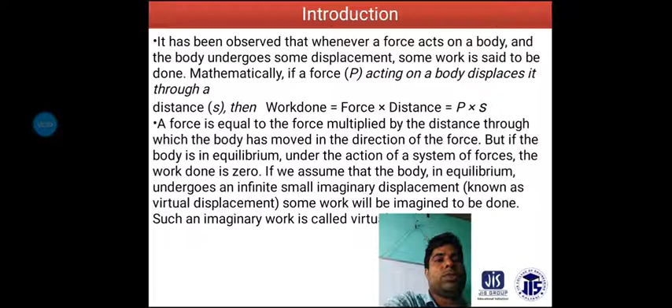But if the body is in equilibrium under the action of the system of forces, the work done is zero. So we assume the body in equilibrium undergoes an infinitely small imaginary displacement, known as the virtual displacement, and some work is imagined to be done. Such imaginary work is called virtual work.

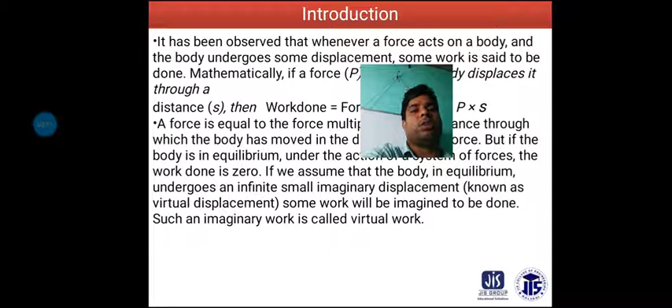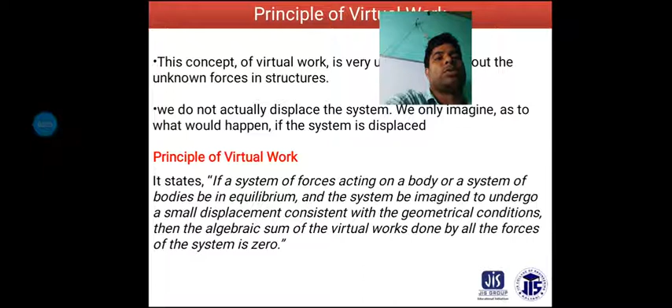The concept of virtual work is very useful in finding the unknown forces in structures. We do not actually displace the system, we only imagine what would happen if the system were displaced. The principle of virtual work states that if a system of forces acting on a body or a system of bodies is in equilibrium, and the system is imagined to undergo a small displacement consistent with the geometrical conditions, then the algebraic sum of the virtual works done by all the forces of the system is equal to 0.

Now this is an example problem on the principle of virtual work. Consider a beam AB of span 5 meter carrying a point load of 2 kilonewton at a distance of 2 meter from A. Determine the beam reactions using the principle of virtual work. Span L is 5 meter, point load W is 2 kilonewton, and the distance between the point load and support A is 2 meter.

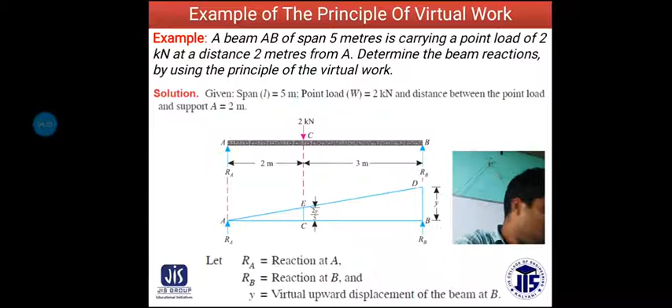In the figure, RA is the reaction at A, RB is the reaction at B, and y is the virtual upward displacement of the beam at B. From the geometry, the virtual upward displacement of the beam at B is y, and the virtual upward displacement at C is 2y by 5, which equals 0.4y as shown in the figure.

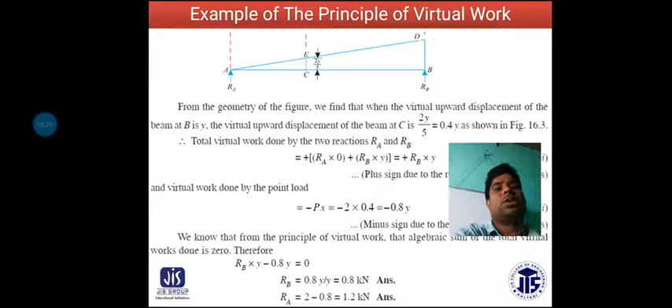The total virtual work done by the two reactions RA and RB is RA into 0 plus RB into y, equal to plus RB y, the plus sign because the reaction acts upward. The virtual work done by the point load is minus P x, equal to minus 2 into 0.4y, which is minus 0.8y. The minus sign is because the load acts downward.

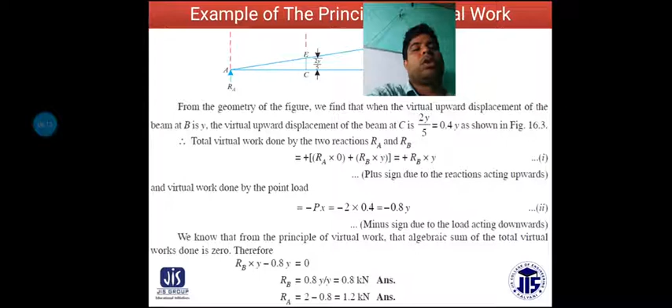From the principle of virtual work, the algebraic sum of the total virtual work done is 0. Therefore RB into y minus 0.8y is equal to 0. So RB is equal to 0.8 kilonewton and RA is equal to 1.2 kilonewton.

Now another problem: two beams AC and CD of length 9 meter and 10 meter respectively are hinged at C. They are supported on rollers at the left and right ends A and D. A hinge support is provided at B, 7 meter from A, as shown in the figure. Using the principle of virtual work, determine the force transmitted by the hinge C and the reaction at support B when a load of 700 Newton acts at a point 6 meter from D.

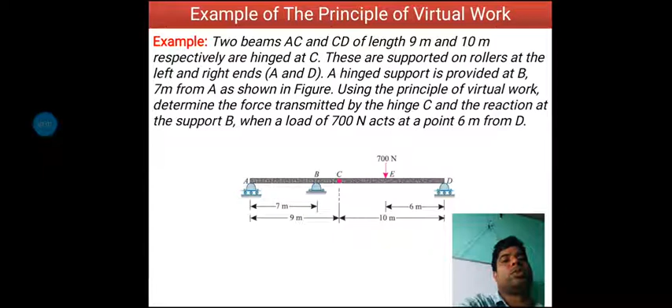The virtual displacements of B and E are 7y by 9 and 6y by 10, that is 3y by 5, respectively. The total work done by the three reactions RA, RB and RD is RA into 0 plus RB into 7y by 9 plus RD into 0, which equals RB into 7y by 9. The virtual work done by the load is minus 700 into 3y by 5, that means minus 420y.

The algebraic sum of the total virtual work done is 0. Therefore RB into 7y by 9 minus 420y is equal to 0. So RB is equal to 540 Newton.

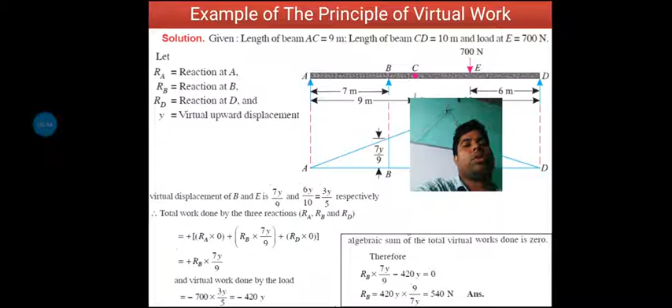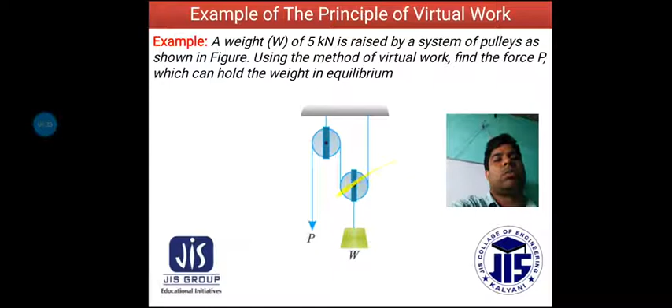Solution: given W is equal to 5 kilonewton, P is the force which can hold the weight in equilibrium, and y is the virtual upward displacement of the weight. Now from the geometry of the system of pulleys, we find that the virtual upward displacement of the weight is y. So the virtual downward displacement of the force is 2y.

Now virtual work done by the load is equal to 5y, plus sign due to upward movement of the load. Now virtual work done by the effort is equal to minus P into 2y, which is equal to minus 2Py, minus sign due to downward movement of the effort.

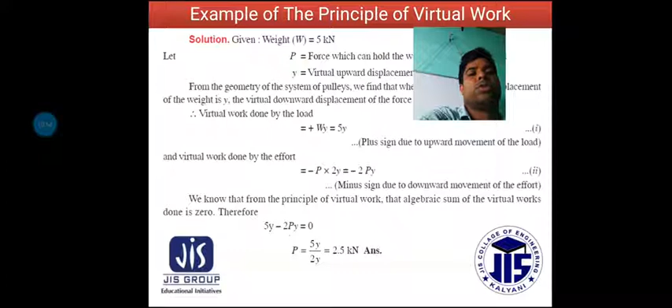We know that from the principle of virtual work, the algebraic sum of the virtual work done is 0. So therefore 5y minus 2Py is equal to 0. So P is equal to 5y by 2y, that means 2.5 kilonewton. So this is another type of problem related to virtual work.

A weight of 1000 Newton resting over a smooth surface inclined at 30 degree with the horizontal is supported by an effort capital P, which is resting on a smooth surface also inclined at 45 degree with the horizontal as shown in the figure. By using the principle of virtual work, calculate the value of effort capital P.

So there are two conditions. One smooth surface, with one weight on the inclined surface at a 30 degree angle. And the next case is one effort on the right hand side, which makes an angle with the base of 45 degree.

Now the solution: the weight W is equal to 1000 Newton, inclination of the weight surface alpha 1 is equal to 30 degree and inclination of the effort surface alpha 2 is equal to 45 degree. Now x is equal to the virtual vertical displacement of the 1000 Newton weight, and y is equal to the virtual vertical displacement of the effort capital P.

Now from the geometry of the system, we find that when the weight of 1000 Newton moves downward, the effort P will move upward. So we also find that the distance through which the 1000 Newton weight moves downward on the inclined surface will be equal to the distance through which the load P moves upward on the inclined surface. So the distance through which the 1000 Newton weight moves on the inclined surface is AC.

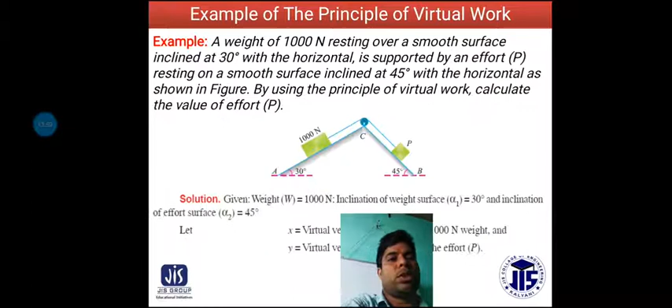So AC is equal to x by sine 30 degree. Sine 30 value is 0.5, so AC is equal to 2x. Now the distance through which the load P will move is on the inclined surface BC, at an angle of 45 degree. Now BC is equal to y by sine 45 degree, that means y by 0.707, that means 1.414y.

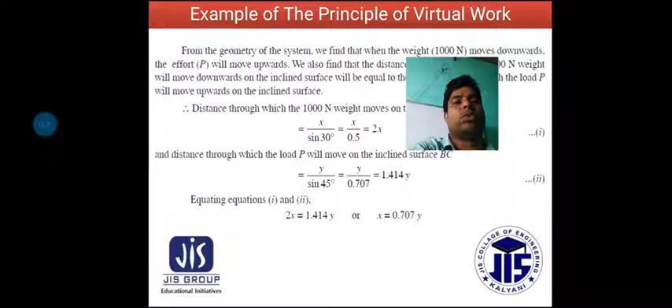Now equating equations 1 and 2, we get 2x is equal to 1.414y, or x is equal to 0.707y. So virtual work done by the effort capital P is equal to plus P into y. The plus sign indicates the upward movement of the effort.

And the virtual work done by the 1000 Newton weight is minus 1000x, which is equal to minus 1000 into 0.707y, that means minus 707y. Minus sign due to downward movement of the weight.

Now, from the principle of virtual work, the algebraic sum of the virtual works done is 0. Therefore, Py minus 707y is equal to 0. So P is equal to 707 Newton. So that's the problem solution.

So in today's class, we have discussed more or less 4 or 5 new problems related to virtual work, and before calculating the virtual work problems, we discussed some theoretical parts related to the problems.